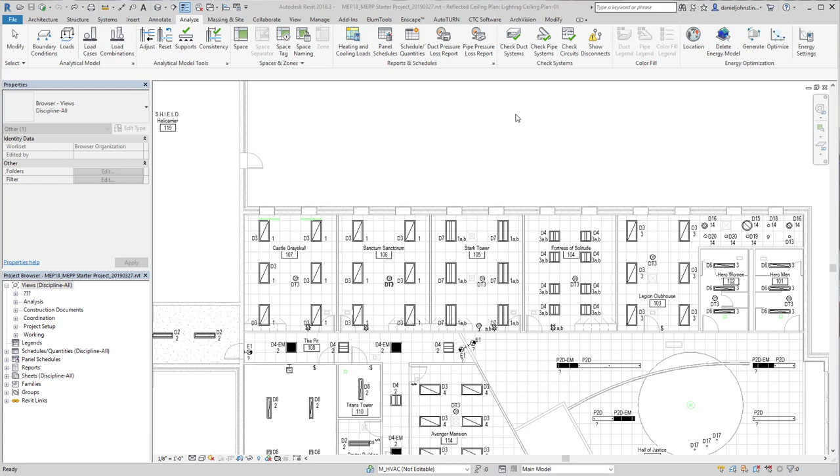In this video, we're going to look at a new feature in the MEP Productivity Pack 2018 update related to lighting fixtures, and specifically tracking design target average illuminance per space related to lighting fixtures.

So to start out with, if we select the space in this particular office, you'll notice over in the Properties palette that we have some parameters to specify the type of space, and the fact that we want to hit 30 foot candles for an average target illuminance at a work plane of 2'6". There's some other notes here related to controls and regular notes.

The type for the space is down under identity data, and it's the target illuminance room type. You have this drop-down list where you can pick different room types. So if we were to switch from office to reception, you'll see the design information we want to hit changes. It went from 30 average foot candles to 40.

One more example just for comparison purposes. If we were to look at something like a corridor, the work plane is going to be at 0, foot candles 10, with an occupancy sensor.

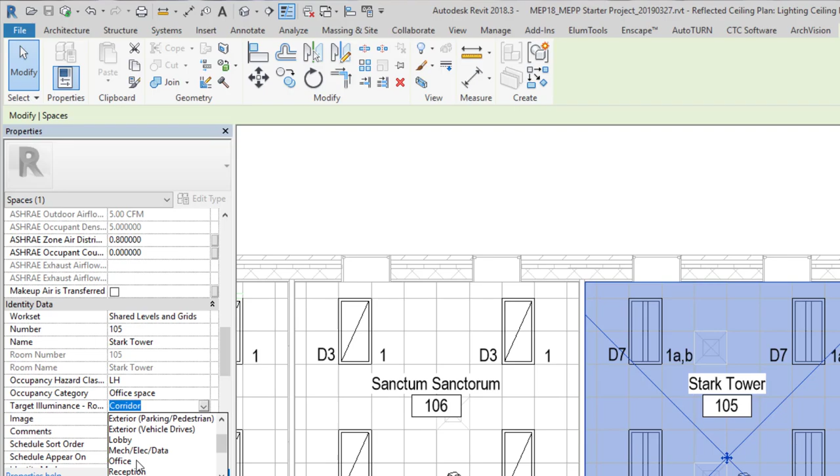So let's set that back to office, and then I'll show you where this is set up. If we go to the schedules, you'll notice in 2018 they're organized now by discipline. Under lighting analysis, we have two schedules, and one of them is called a schedule key, and you can actually add to this schedule by clicking the insert row option.

I click insert row, and I'm just going to write something different so it stands out, like Apple. Then we can type in our target illuminance and work plane height. Notice these are the proper units, so I don't have to type the foot and inch symbol or the foot candle symbol. Then we can type information about the control type, a drop-down list will give us all the options previously typed in, and then any notes here is what we can type.

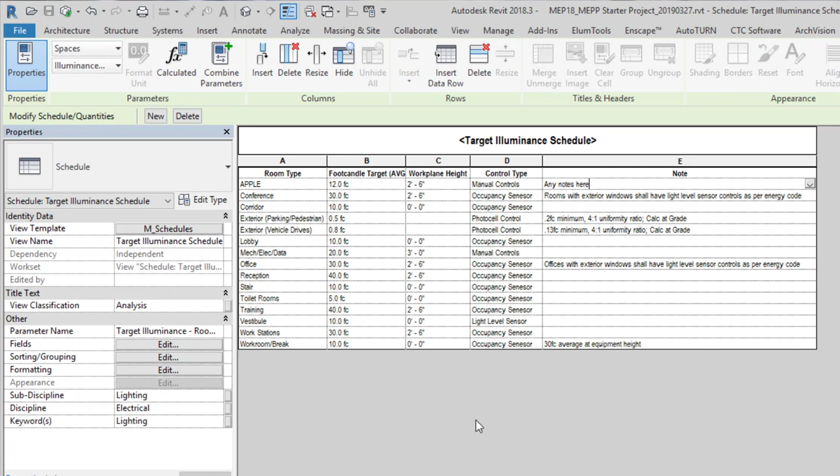So now if we go back to our floor plan and select that same room, we'll go down to identity data, and Apple is now an option in this list. When we pick that, we'll see that the amount of foot candles we typed in, 12, 2'6", manual controls, and any note here all shows up.

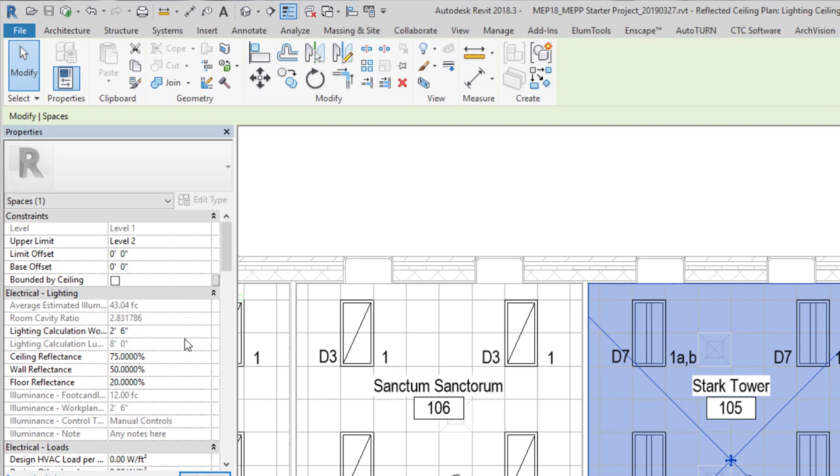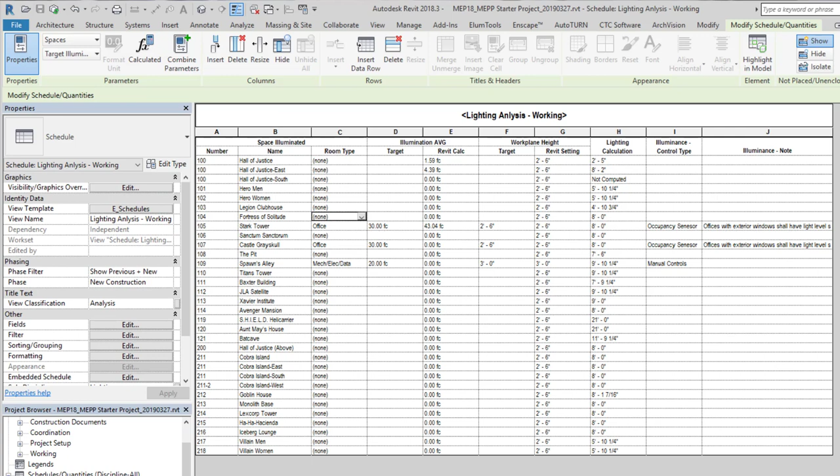So this is purely for reference to be able to capture design intent. Perhaps a senior designer could go into this lighting analysis working schedule, see all the room numbers and names, and go down this list, or do it in the plan view so it's a little more contextual, to specify what the room type is, or even add additional rows to this target illuminance schedule like we did.

And then as the design evolves and lighting fixtures are added to the space, as we see here, Revit has the ability to do what's called a zonal cavity calculation based on the lighting fixtures and the photometry, giving us a really preliminary average illuminance. This is primarily accurate for rectangular spaces, but it's still a good early rule of thumb. You can see there's 43 foot candles right now, and we're shooting for 30, so perhaps we could change the layout and lose a light fixture. Being a little bit over maybe isn't a problem.

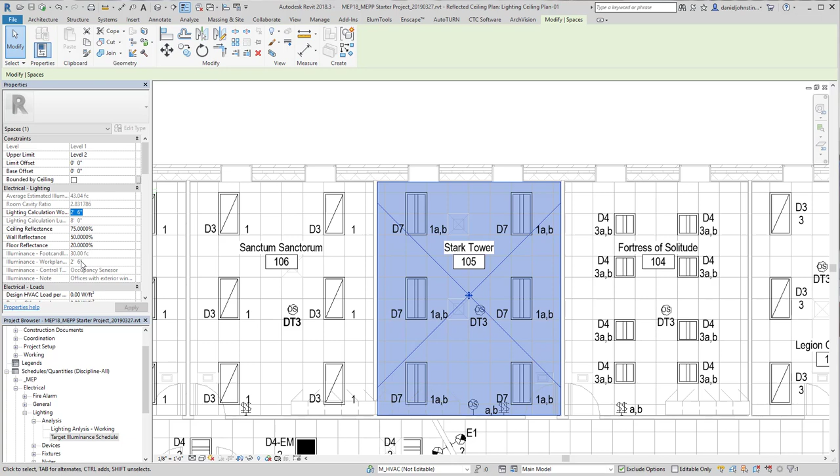We also want to make sure that the lighting calculation work plane matches what we're shooting for. If we go back and look at our working schedule, we see that we'll actually have the target illuminance, average illuminance, and then the Revit calculated average illuminance, and the same for the work plane height. So there's what we've plugged in as a target, and then what Revit's using for this preliminary calculation, and our control type and illuminance note.

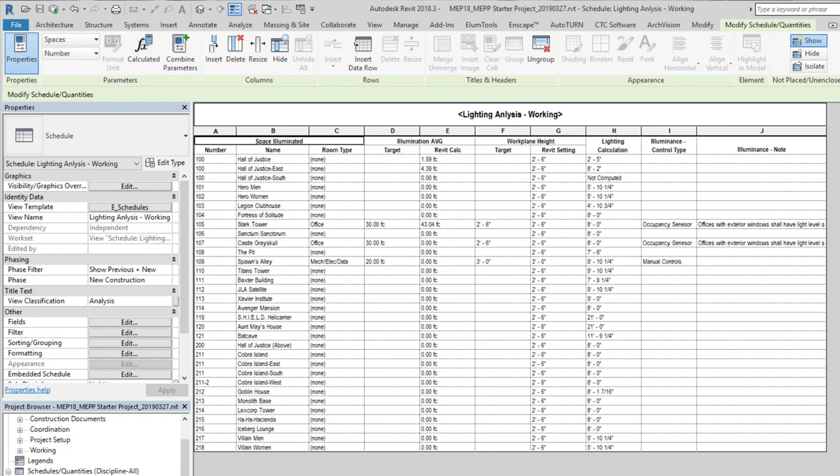So perhaps none of this will show up on the drawings anywhere, but it's a helpful design tool in an early state. Eventually you'd want to do something like use ElumTools, the professional lighting calculation add-in for Revit.

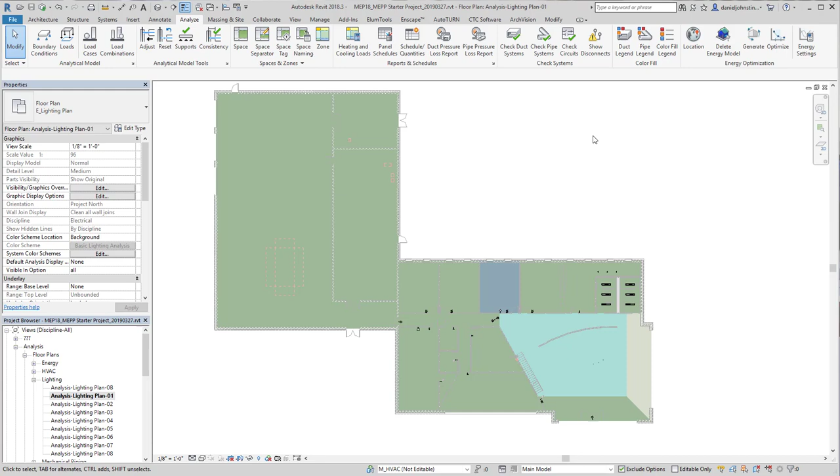The last thing we have related to this is under Views, Analysis, Lighting. There's Analysis Lighting Plans, which show a color fill legend. If the legend's not showing up, you can go to Analyze, Color Fill Legend, and add that. So you can see only one room right now is really anywhere near the correct ballpark for an average illuminance.

By the way, not until Revit 2019 do LED or absolute photometry IES files actually work for this particular calculation, the average estimated illuminance. Previous to Revit 2019, which the MEP Productivity Pack is currently shipped in for 2018, that calculation won't work for IES files. That's why these other rooms, which do have light fixtures but have absolute photometry associated with them, the calculation says 0. But if a project or the MEP Productivity Pack starter template is upgraded, then it'll immediately start working. It's just a Revit limitation.

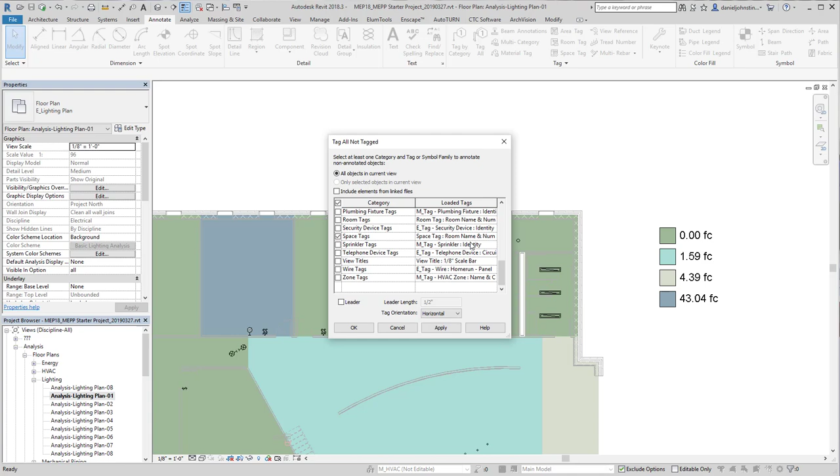If we wanted to add tags, we could go to the Tag All command, go down to Spaces, so Space Tags, pick our tag type from that drop-down list, and then hit Apply. Now we have a tag in every room.

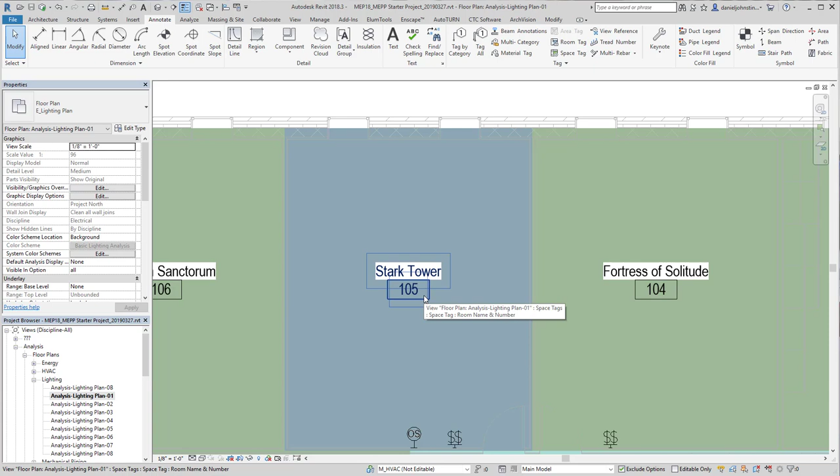Unfortunately, the target, average illuminance, and work plane heights can't be associated with this tag because schedule keys do not allow shared parameters to be in them. So those parameters are not shared parameters, therefore they cannot be associated with tags.

So that's a quick look at the target average illuminance functionality built into the Mechanical Electrical Productivity Pack 2018 version update.